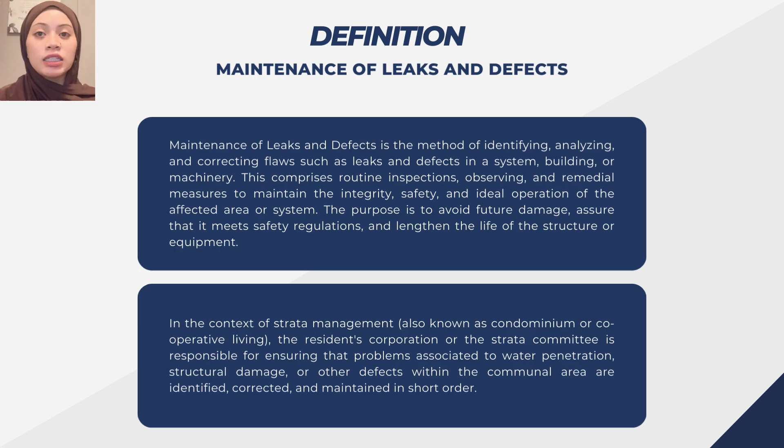The purpose is to avoid future damage, assure that it meets safety regulations, and lengthen the life of the structure or equipment. In the context of strata management, the residents' corporation or strata committee is responsible for ensuring that problems associated with water penetration, structural damage or other defects within the communal area are identified, corrected and maintained in short order.

The importance of maintaining leaks and defects for strata buildings: firstly, it can affect the health and safety of residents, where leaks can produce mold growth which can endanger tenants' health and cause allergies and respiratory issues.

Additionally, flaws may result in electrical problems, falling debris, or unstable surfaces that pose a safety risk.

Next is the importance of preserving property values. Regular maintenance and timely repairs can help preserve the value of the property. Well-maintained buildings have a higher value retention rate and are more appealing to potential purchasers or tenants.

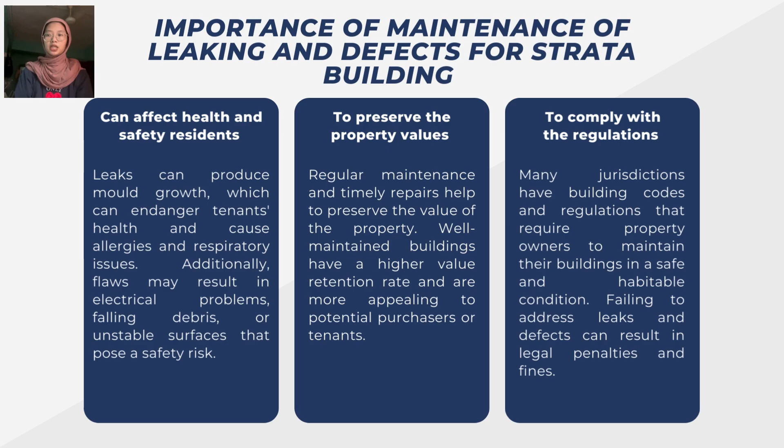Next is to comply with regulations. Many jurisdictions have building codes and regulations that require property owners to maintain their buildings in a safe and habitable condition. Failing to address leaks and defects can result in legal penalties and fines.

The next part is issues of leaks and defects. The first one is leaks at the plumbing pipe. The second is broken stair handrail at every floor. The third is cracked and broken cement floor.

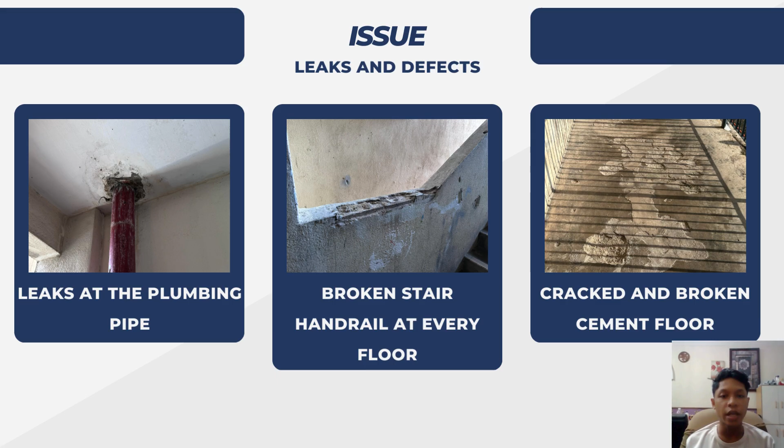As you can see, these are the defects that we found. The most common ones are the leaks at the plumbing and the broken stair handrail at every floor. These are the two issues that are critical and mostly found at the building.

The leak at the plumbing pipe may happen due to cracked and broken cement, which causes spaces around the pipe. The consistent leak may cause structural damage to the floor as the water goes through it, causing dampness and the affected area to become larger. The moisture from the leaks can cause mold growth, which affects air quality and causes health risks.

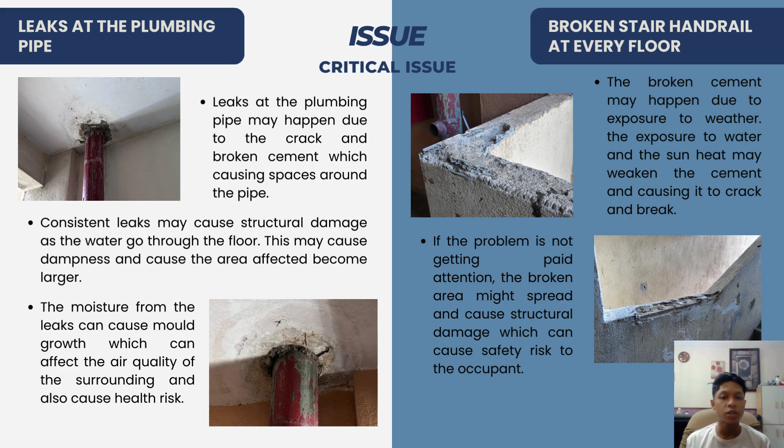Next is the broken stair handrail at every floor. The broken cement may happen due to exposure to weather; water and sun heat may weaken the cement, causing it to crack and break. If the problem is not addressed, the broken area may spread and cause structural damage, posing a safety risk to the occupants.

In this slide, I will explain the maintenance requirements for leaks and defects in strata buildings. Firstly is the duty to investigate.

An inspection to identify the cause of leaks and defects in strata building should be conducted within 7 days from the issuance of the notice. The Commissioner of Buildings (COB) will designate a qualified professional such as a registered architect, engineer, quantity surveyor, or building surveyor to assist in determining the cause.

The costs associated with this appointment will be covered by the party accountable for the leak or damage. Within 5 days from the date of inspection, a Form 28 certificate of inspection will be issued to state the

cause of the interfloor leakage and the party responsible to rectify. Second is the duty to rectify. The entity identified as responsible by the management or COB is obligated to initiate all essential actions and measures for the rectification of leaks and defects in strata buildings within 7 days upon receiving Form 28.

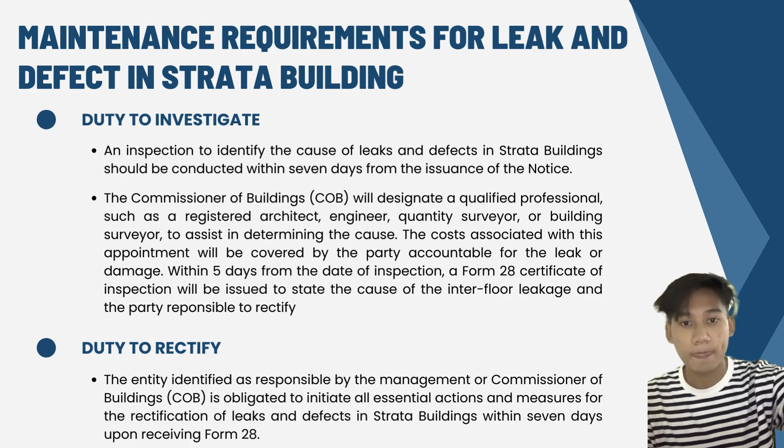Next is access. The party responsible for carrying out the inspection or the rectification works has a right to access the building. Any person or individual failing or refusing to grant such access commits an offence.

Lastly is planning for major repair and maintenance management of funds. An annual maintenance plan is the preventative maintenance schedule and record of compliance for strata property. An annual operation schedule identifies: first, major capital repair and replacement for that year that is part of the 10-year capital works plan; second, current condition of the strata building; third, due date to be repaired or replaced.

Fourth is the expected life of the building services or elements once repaired or replaced. And lastly, the estimated cost of the repair and replacement for leaks and defects in strata building.

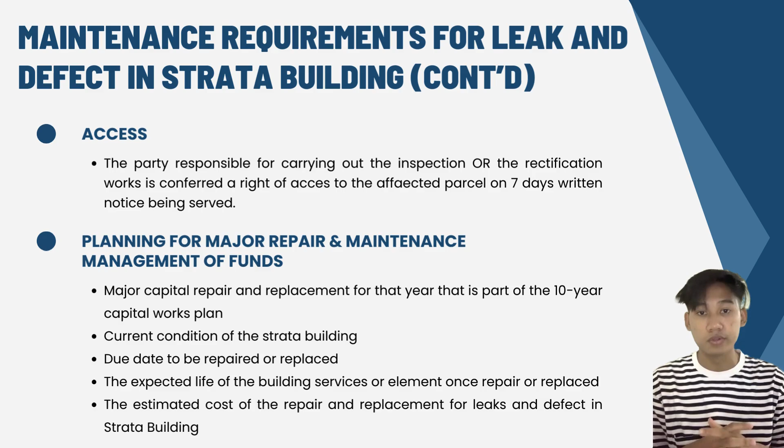For the proposed solution for the issue of major leaks at the plumbing pipe: first, conduct a detailed inspection of the entire plumbing system on every floor and determine the cause of the leaks. Second, implement a regular maintenance schedule to check for and address any signs of wear and tear before they become major issues, by installing a leak detection system that can alert building management to leaks as soon as they occur.

Third, hire professional plumbers to carry out the repairs and upgrades. For example, consult structural engineers to assess and address any impact on the building integrity. Fourth, keep tenants informed about the repairs and what they can do to help prevent leaks, such as reporting issues

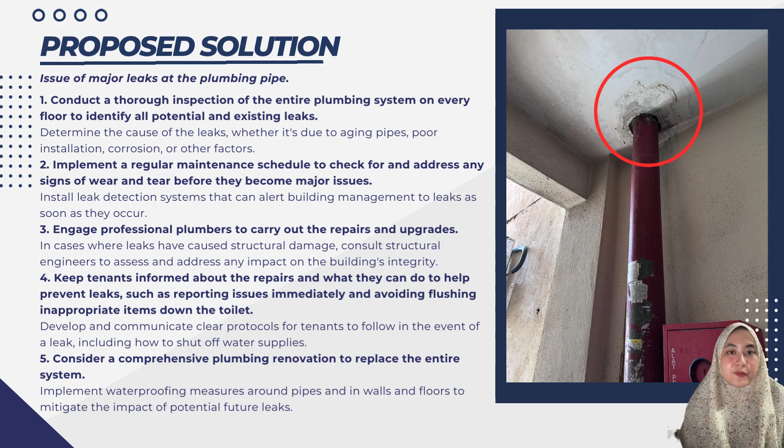immediately and avoiding flushing inappropriate items through the toilet. Fifth, consider a comprehensive plumbing renovation to replace the entire system, by implementing additional waterproofing measures around pipes and in walls and floors to mitigate the impact of potential future leaks.

Next, the proposed solution for the second issue, the broken part at the stair handrail at every floor. The first proposed step is assessment: have a structural engineer or qualified contractor assess the extent of the damage and identify underlying causes.

The second is the solution: apply a bonding agent or primer to improve adhesion between the old and new concrete surface. For legal compliance, ensure repairs meet local building codes and safety standards to avoid liability and ensure resident safety.

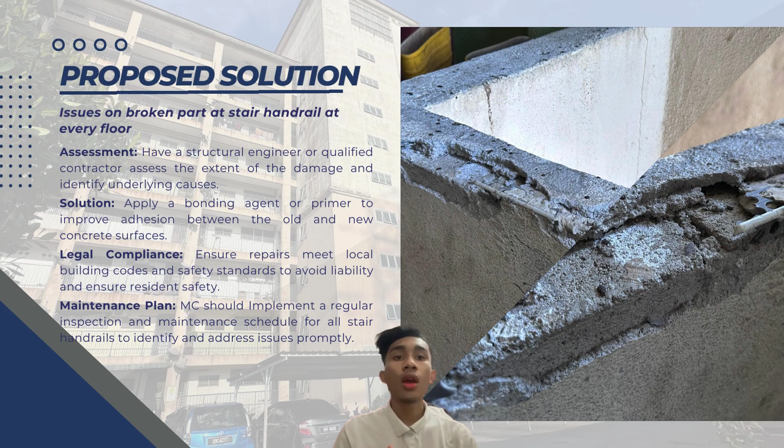And the last one for the proposed solution is the maintenance plan. The MC or JMB should implement a regular inspection and maintenance schedule for all stair handrails to identify and address issues promptly.

In conclusion, remediating leaks and defects in strata buildings is important in providing safety, protecting asset values, and adhering to regulation. Building management may prevent possible threats to health and structural damage by performing comprehensive assessment, regular maintenance, and quick repairs. Besides, using expert services and developing leak detection systems can improve the efficiency of this procedure.

Making sure tenants are aware and participating in the maintenance process improves the overall integrity and safety of the building.